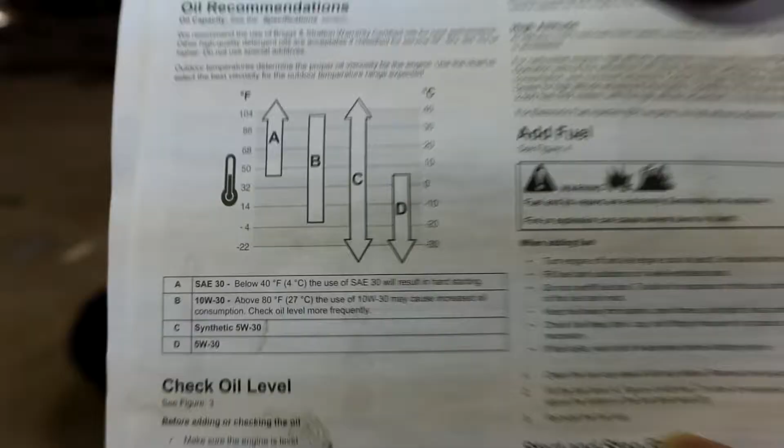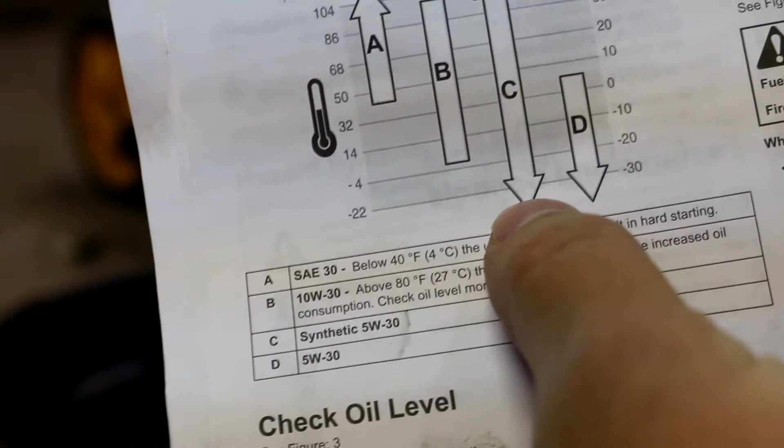Now this one right here, A is SAE 30, just a 30 weight oil, B is 10W30, C is a synthetic 5W30, and D is a 5W30.

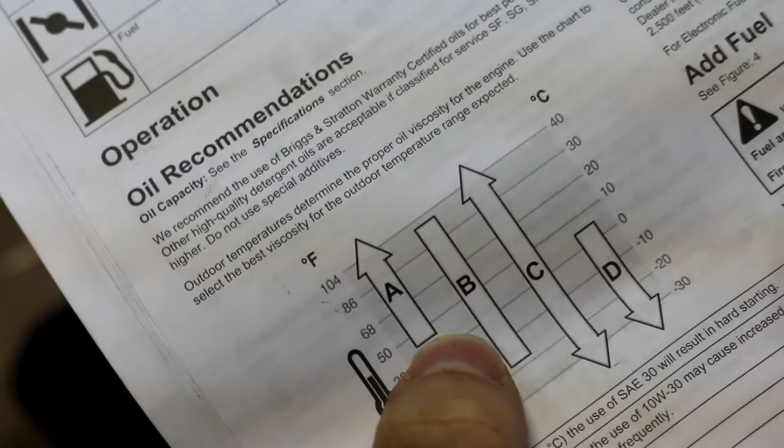Now if you look at the Fahrenheit scale on the left side, it says SAE 30 is only good for about 40 degrees or above, which for most people will be fine, but honestly 5W30 is easier to find. And B says above 80 degrees Fahrenheit, the use of 10W30 may cause increased oil consumption. So you can use it, but I'd recommend not using it.

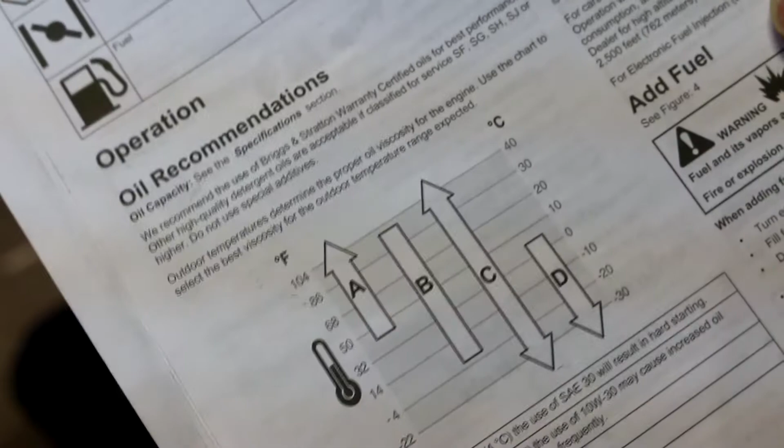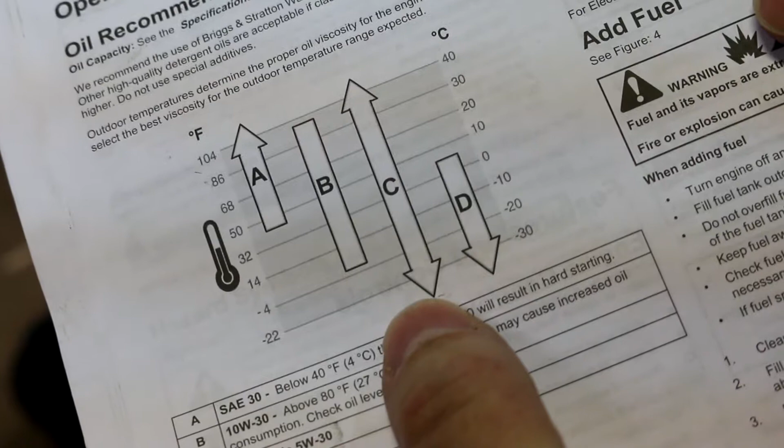What I'm using is a synthetic 5W30, which is good across the board, so that's the best option for this engine. And then D is anything below like 40 degrees, which I don't think you're really going to be mowing the lawn if it's that cold.

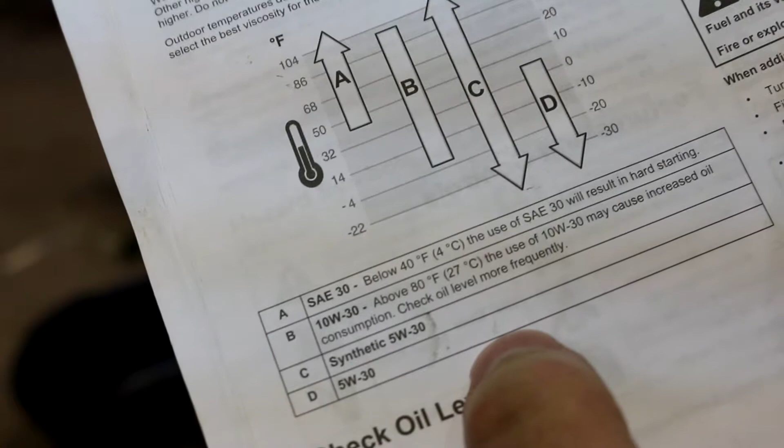So first things first, what you need to do is on this engine they tell you to pour it out of the oil fill hole. There's no hole on the bottom or anything like that, so you've got to tip the whole thing over. So where the oil fill hole is, right here.

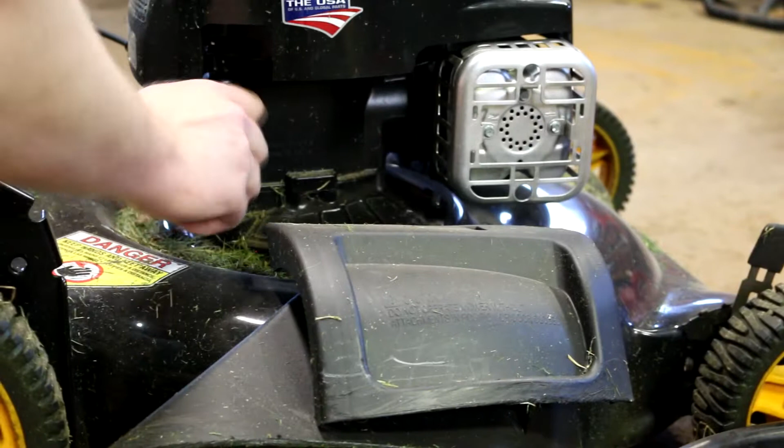What you want to do is remove that. Generally they're finger tight, but sometimes they do get stuck - you just get a flathead screwdriver. And this doubles as your dipstick.

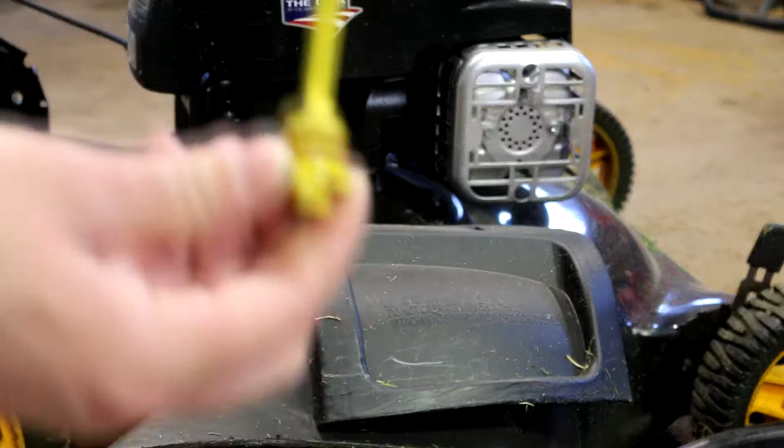So you want to take that out. I always put it in here so I don't lose it - who cares if it gets oil on it. The next thing you want to do is tip the whole thing over and capture the oil out of it.

So to get a little bit easier access, you can remove your chute. And what I like to do is kind of a double thing here - you can put the funnel below it and lift it up at the same time. They're not that heavy, but you'll see oil coming out of it.

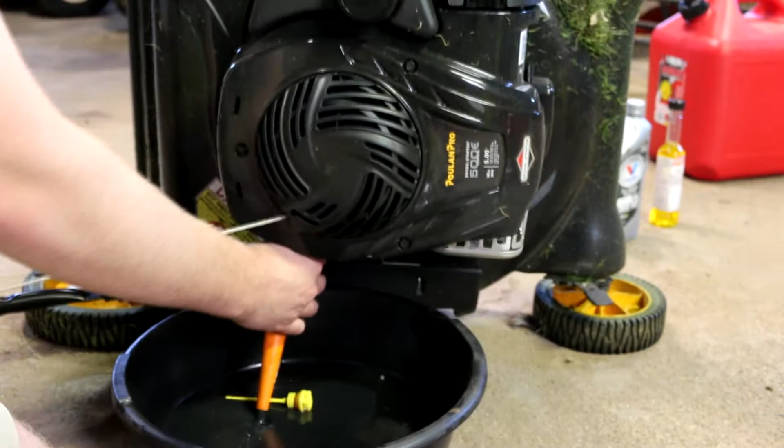Alright, one thing I did forget to mention is that this engine was run about an hour ago, so it is lukewarm. You don't want it cold - you want the engine oil warm for best results. It's not crucial, but I highly recommend it, just the same as your car. But we spilled a little bit.

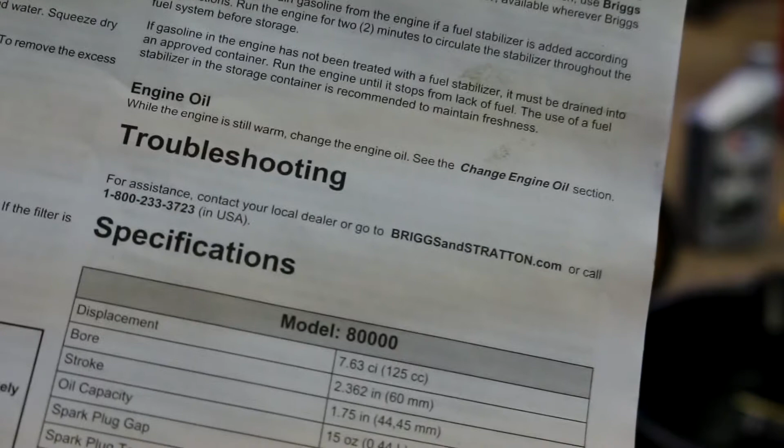Now again, you've got to consult the owner's manual for specifications. Specifications for this guy here - your oil capacity is 15 ounces.

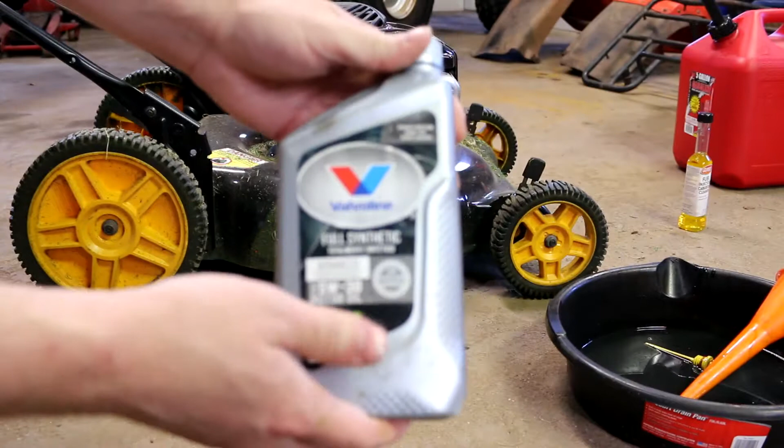So you take your oil, your 5W30 - I run Valvoline in pretty much everything. 15 ounces is about half. It's pretty much what you want to do.

Take your oil and your funnel, the same funnel that you used to drain it, you stick it in there, and pour it in. So that's about half of a quart.

It's not rocket science, it doesn't have to be precise - most people would disagree - but then you can take your dipstick like you had earlier. I always set it in there. I don't know if you're supposed to screw it or not.

It's wet right there, so it's darn near perfect. If you screwed it in, it'd be to the full line, so either way you're good. That's all I need to do next, screw this back in.

And your oil is changed in your lawnmower. It's that simple, no filters, nothing. Now this thing's been sitting all winter, but like I said, I just ran it about an hour ago.

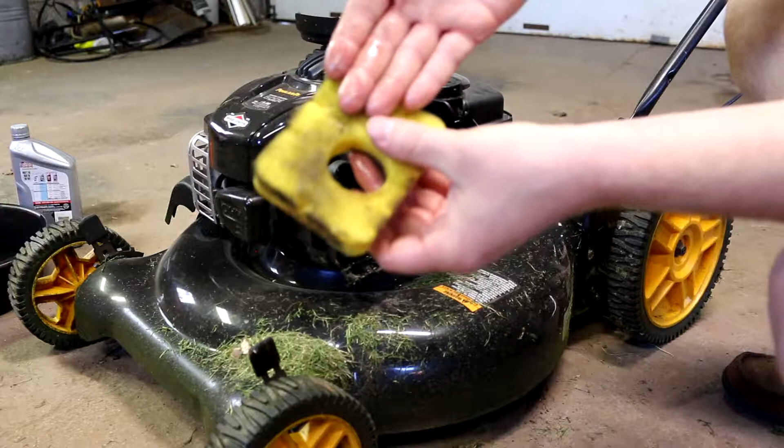But next, what you got to do is check your air filter. You check it by taking it out of there, and you'll see all this crap build up. What I'm not going to show you is you take this, put some dish soap, clean it, get it real nice and clean. Then you want to take some of your oil and pour it all in there, make sure it's all oily. You can see on my hands there's oil coming on - this is an oil infused filter.

After you do that, you want to make sure everything in here is clean. You can see a little bit of crap around there - take your rag, wipe it down. Stick the filter back in after you clean it. Like I said, I'm not going to show you how to clean it. And then put the cover back on.

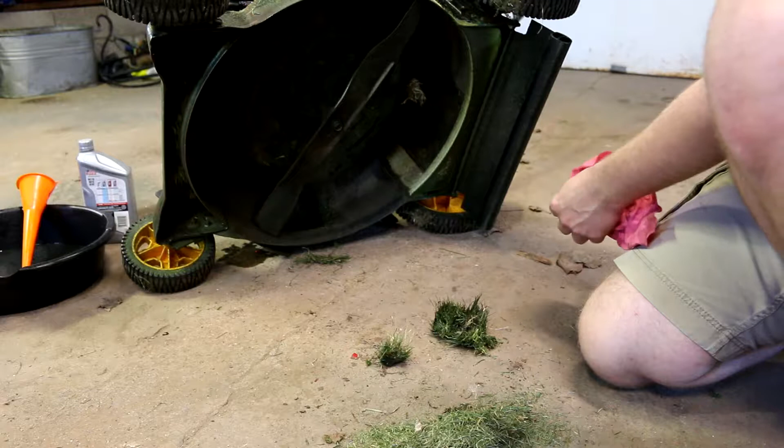And that pretty much wraps up everything you need to do to your lawnmower. You can go as far as cleaning all the brush off and everything like that, but it's just going to get back on there anyway. If you're not comfortable with cleaning up underneath of it, you can always pull the spark plug and it ain't going to start on you at all. But I'd highly suggest every so often just take a look underneath of it, see if there's any sort of grass buildup or anything like that. This one's pretty good still, so I'm not going to touch it. The blade is only a year old, so I'm not going to touch that either.